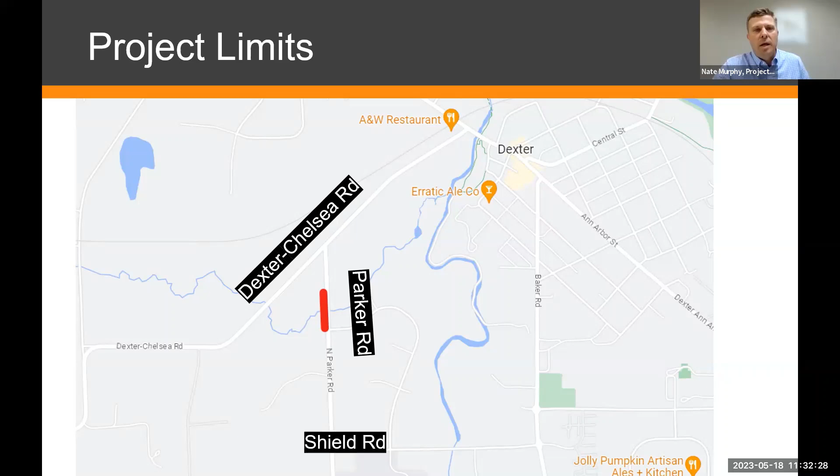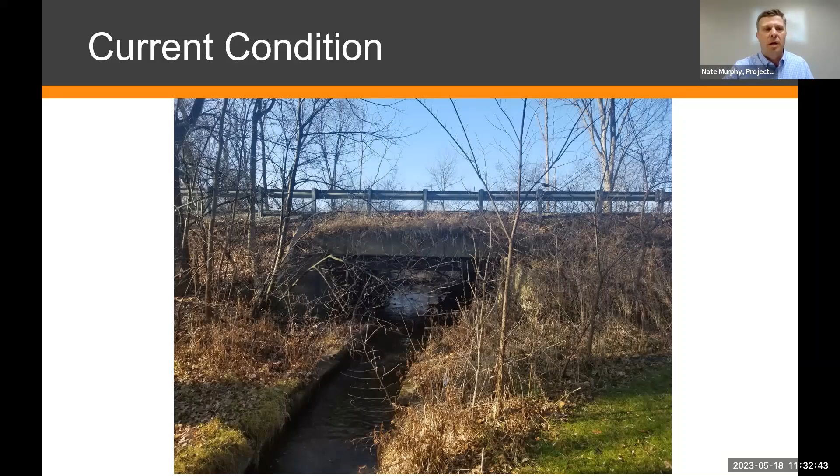If you go to the next slide, the existing structure is a short span bridge with steel beams, which are deteriorating and must be replaced. So as part of this project, we'll be completely removing that one and installing a new one.

Next slide. I just wanted to show you some pictures of what we'll be doing. This is a project that we did a couple of years ago on Cavanaugh Lake. It's very similar to what this one will look like. They did build it up on the road.

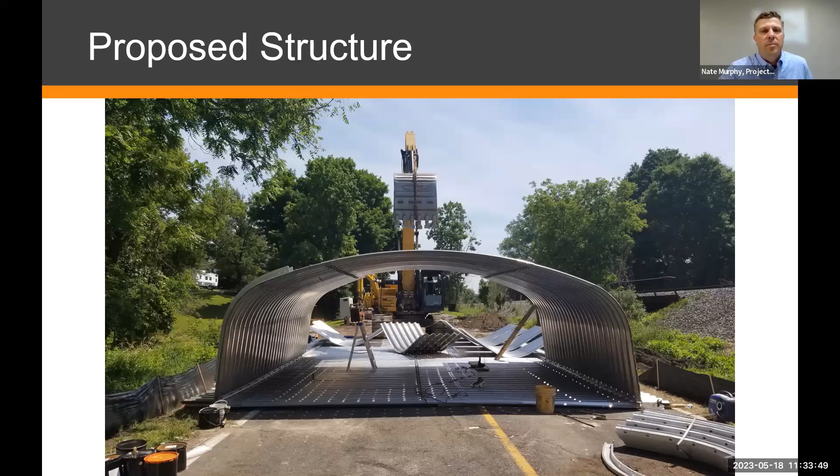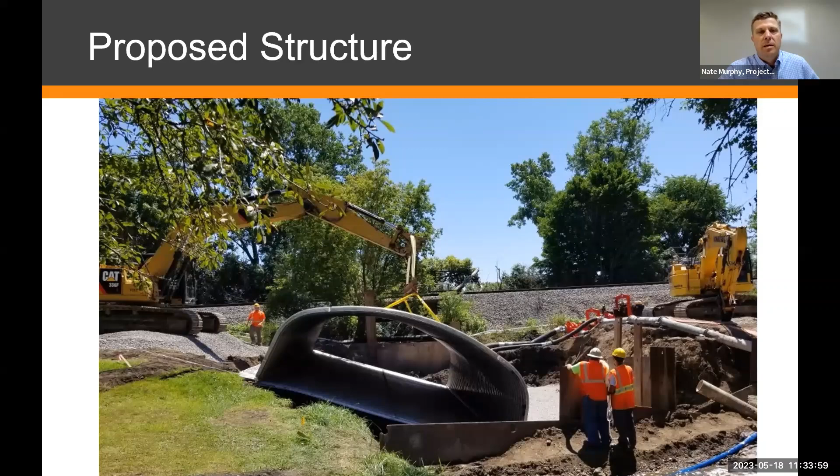If you go to the next slide, you can see they drop it down into the hole. The next slide shows the excavation is completed. They've installed it down into the stream bed, and are now building the walls up there at the top. You can see them building it. This one will be very similar to that.

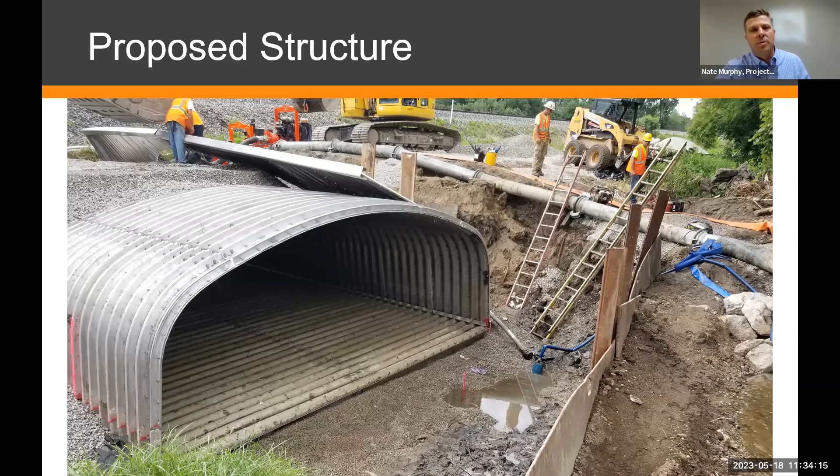They dam the water and keep the water flow using pumps. Here they're putting in the backfill, and as it goes, we build up from there, and then we construct the road, and then we would open the road back up. So that's just some pictures to show you what it looks like. It's interesting to see for those that won't be down there. It gives you an idea of how it works.

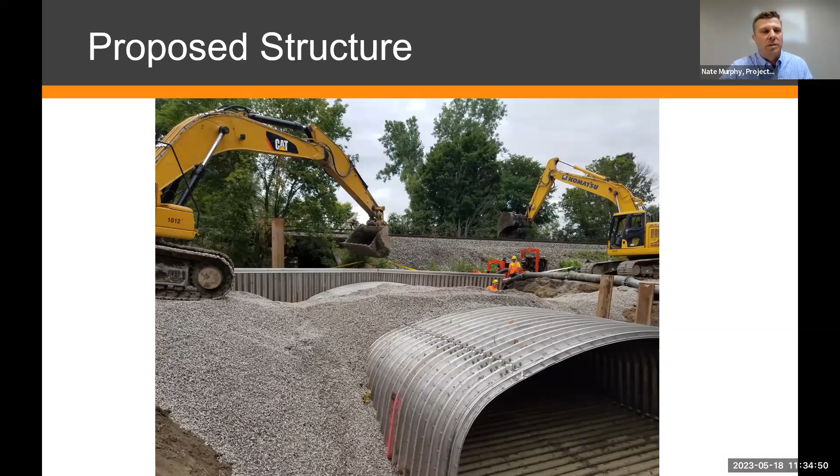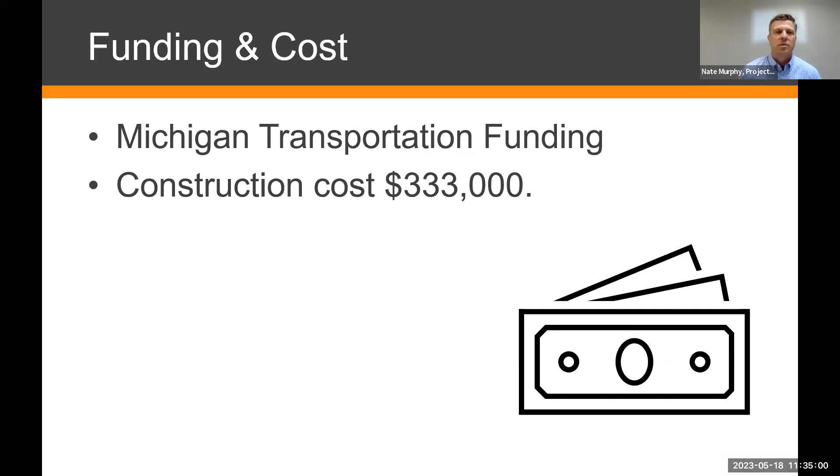The funding for this project is from Michigan Transportation Funding, and it's approximately a cost of $333,000 to do the project.

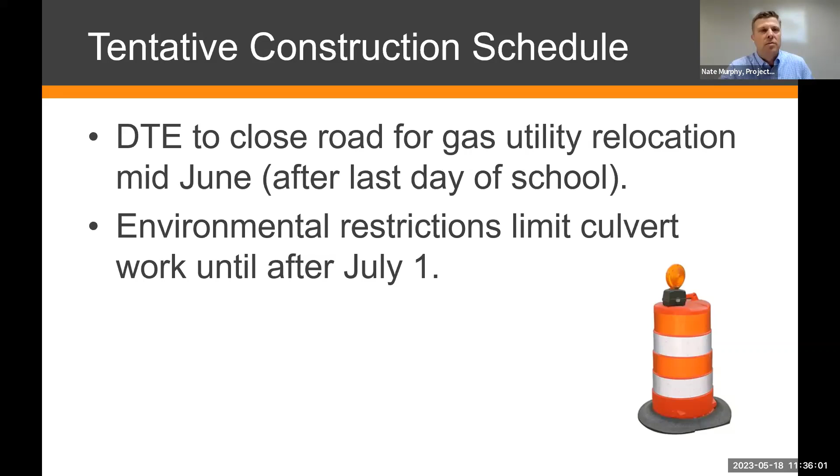Impact to traffic: we will have a full road closure. As you can see from those pictures, there is going to be a large hole there, and you will not be able to get through. So it'll be a full road closure, and we expect approximately a 7-week construction duration.

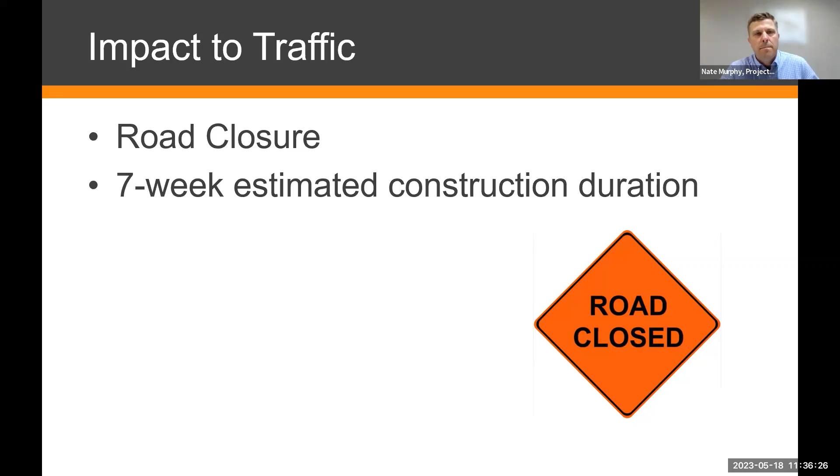We will have barricades and post a detour, but please do not move any of the barricades. The road will be fully closed. We can't overemphasize that. Please pay attention to the traffic directions and the detour routes, and use those.

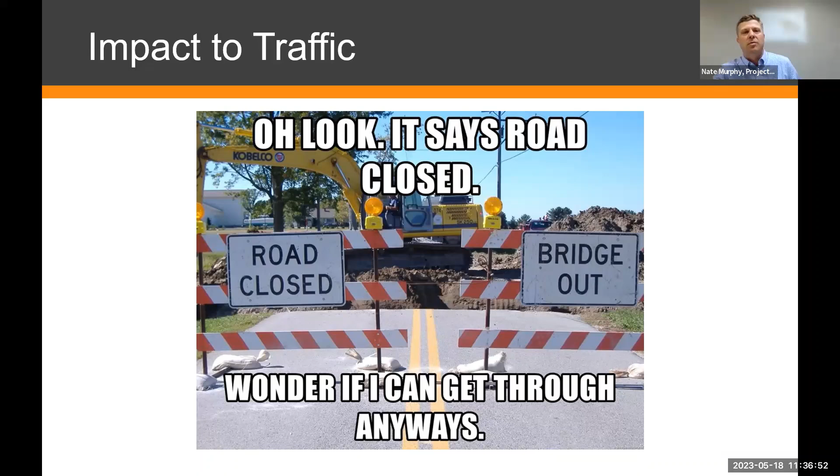Thanks, Nate. Now I'm going to take a second to show you guys how to sign up for project updates and how to find the project webpage on our website. Just give me one second here.

So if you go to Google and type in WCRoads.org, which I've done here at the top, it'll bring you to our homepage. This is where you can get all the information regarding all of our projects.

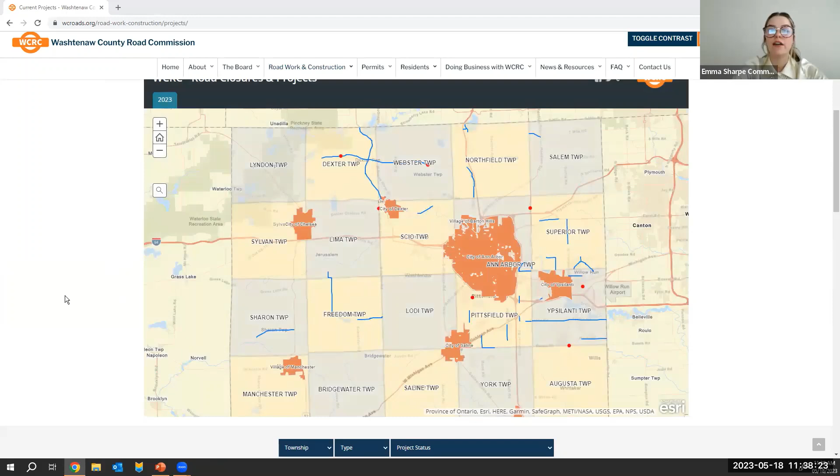Just hover your mouse over the roadwork and construction tab and a drop-down menu will pop up. You're going to want to hit current projects. Here you'll be able to see a county map of everything going on within our county project-wise.

There will also be project pages that you'll be able to click on. They're organized alphabetically, so scroll down and find Parker Road. Click on it.

This will show you the general location of where the project is taking place, which townships, the impact to traffic, as well as any advisories that will be posted regarding the project and any updates while it's taking place. There's Nate Murphy's contact information on the right, as well as the detour map and helpful links.

And the most important button is this orange one that says subscribe to project updates. If you click that, it'll bring you to a form you can fill out and sign up for project updates, so anything that's sent out will be sent directly to your email.